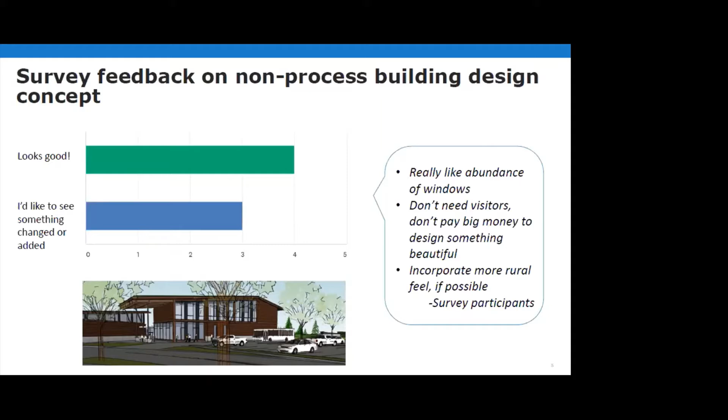So those are thoughts and comments we'll take back. There was also one more slide that looked at the process buildings, and we had more of a negative reaction to this one, where 5 of the 7 would like to see something changed. It looked like those comments were around making sure everything was kept within the height limits, and trying to find ways to keep the height to a minimum by looking at things like partially buried structures or tanks. Again, things we'll pass along to our architects for them to take into account as they start thinking about how to design these facilities.

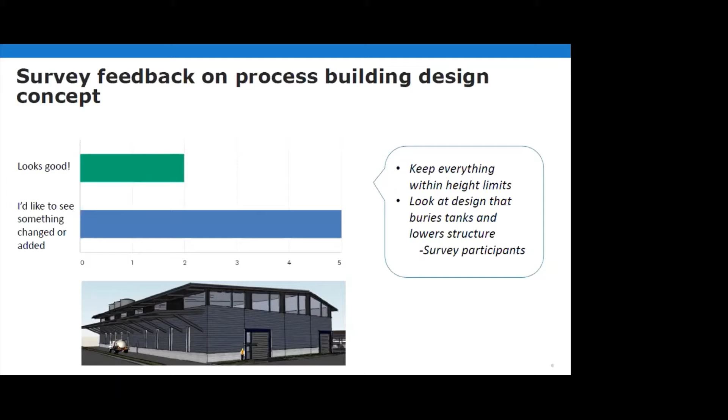So at this point, that's the end of my portion of the presentation. And at this point, I will pass things to John Johnson with the Portland Water Bureau, and he'll get our construction team introduced.

Thanks, David. And thanks everybody for coming tonight and attending the group session here. Most of you, hopefully, have been introduced to me before, but I'm John Johnson with the Portland Water Bureau, and I'm going to be the construction manager representative for the Water Bureau, who's going to work with a team of contractors who will actually build the facility.

Right now I'm the construction manager for the corrosion control facility, and we're working with MWH Constructors on that project. We're also going to work with MWH and a joint venture with Kiewit on the facility. We selected MWH and Kiewit here sometime last year to be the CMGC, the construction manager and general contractor, for the filtration facility construction.

We're entering into a contract currently for pre-construction services, and that stage will last for about 2 years. The team will help us by providing insight into construction practices, estimating, and a lot of different aspects of contractor expertise on the input of the design. So with that, I'd like to introduce the team of MWH and Kiewit, starting with their construction manager, John Kolkman.

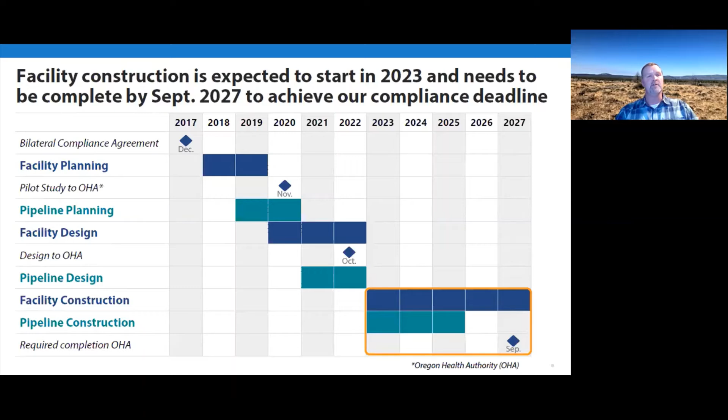Right now we're in pre-construction and we're also in design. So the construction team is going to work hand in hand with the design team throughout the design process to help maximize the design efficiency, get contractor input early in the process so that we can incorporate those things and keep moving forward. Obviously, we're going to have ongoing community conversations with you and with others.

We're going to be coordinating the facility design and getting contractor input on construction to the designers so we can best incorporate that. We're going to continue to evaluate traffic and site access considerations. Coordinating with the pipeline design and contractor - you heard a minute ago that we're in the selection process for that contractor, and we understand we're going to have a lot of folks working in the same areas, and coordination between the facilities contractor and the pipeline contractor are going to be important, both with access and construction. So we recognize that as being a high point that we need to focus on.

During construction, obviously, we're going to continue communicating with the public. I am a face that most of you guys have seen prior, and I'll be a face that you will continue to see. Those of you that have gotten to know me a little bit, I think you understand that I'm pretty open and welcome conversations with you. I want to hear from you to see how things are going and see what we can do better. The contractor always has a safety first philosophy: safety for them, safety for you, safety for the project.

We will be developing a construction management plan as we go through this pre-construction phase. We're going to take the input that you guys give us through this process and try to incorporate it as best we can. We can't wave a magic wand and make all of the noise and all of the impacts go away, but we're going to listen and we're going to do what we can to address your concerns.

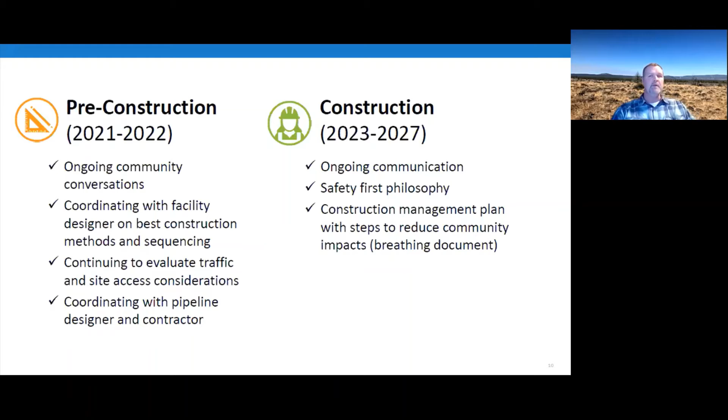With that, I think I'm going to turn it over to John, and he's going to go over a few of these slides more particularly.

Thanks, John. As John had indicated in the previous slide, safety is a very important component for any construction project, and it's a major focus of all of our projects and what we do. But safety doesn't just confine itself to the project construction. It also affects the local areas - it affects people that are living nearby, residents, etc. So it's more than just safety for the construction activities, but safety for everyone.

So how do we try and mitigate some of that? We have very site-specific safety protocols that control access to the site. We want to make sure that the access in and out of the site, regardless of how that turns out to be located, is well managed and kept safe. We want to make sure, for instance, that the site would be secured. It's quite a large construction site in that location, but typically for these types of projects, we would have the perimeter of the site fenced, and additionally, gate security with the compound where the administration and management side of things sits also separately fenced.

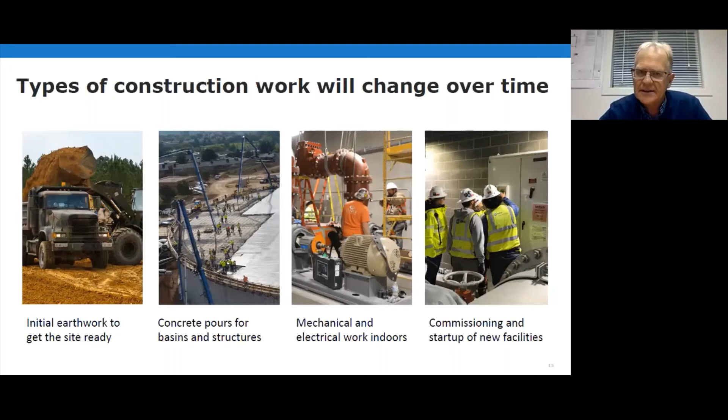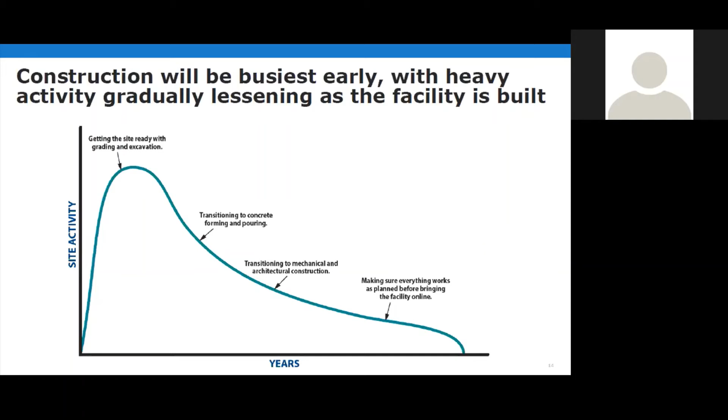I'll pause you again really quick here, because that person also responded that 6:30 is an early time for residential homes, and we do recognize that, but there is going to be some give and take. There's a timeframe that we need to get this project completed, and if we're not getting started that early in the morning, that puts time out further into our process. I don't know if you had anything to add, John, but I just wanted to acknowledge that comment was made. No, there's probably not too much more we need to say about that just at the moment.

Once again, construction activities typically start off primarily with earthwork and then going into concrete. Those first two activities take the first 1.5 to 2 years of the construction project, typically the heaviest portions. In those areas we will definitely have larger numbers of people on site to perform those activities. The concrete work is quite a high workforce period.

The construction activities I'm talking about are still a couple of years out. The fact that we've been brought on early in the process allows us to start trying to plan those things. As the design develops, we can look at what the schedule looks like. Once we get a better feel for what the design really entails, we can look at sequencing and scheduling, and resource loading the schedule to get an idea of what those manpower curves look like, and what work hours we'll be looking at during the weeks to get the work done within the Water Bureau's time frame.

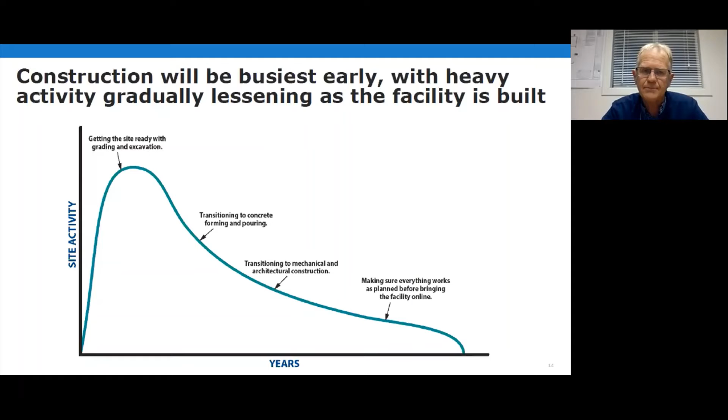There's a number of activities through here, but as we get into the mechanical and electrical, architectural concerns, and then going into commissioning and startup activities, the workforce starts to taper off towards the end of the construction work.

As I said before, the Bureau have already passed on to us some of the community input they've received from the local community. These are things we can take into account as we're trying to plan the construction work through this pre-construction period before we actually get into construction. There's a real benefit to having the ability to have dialogue not just with the Water Bureau and the designers, but also with the construction company that's going to be building this prior to construction even starting. It lends itself well to community involvement and being able to address or minimize some of the concerns that are raised. Also to make sure everyone is on board with what the expectations are for the construction work as we start that phase.

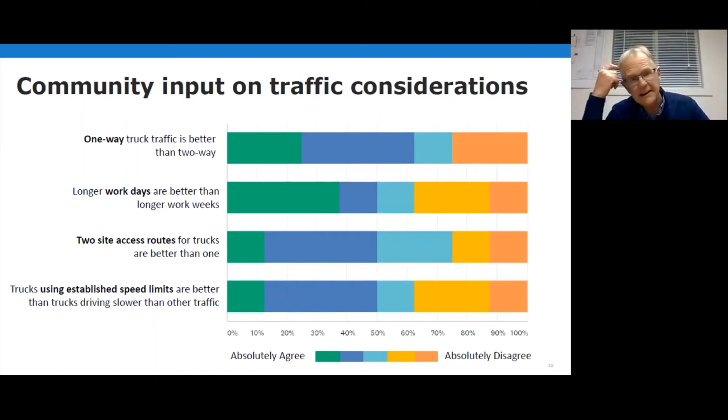Potential strategies to keep traffic moving - there's a lot of factors that come into this. Every project we do has its own differences and particular challenges, and this project is no different. At the end of the day, as John had said previously, there's limited roads in and out of the plant, and we have to share the roads with the residents. There's horticultural traffic in the area, resident traffic, school buses - things at certain times of day that we have to be mindful of and try to manage the work to accommodate local traffic conditions.

We have a lot of different activities going on. The first activities, as far as earthwork, involve a lot of exporting of material - trucking off material that appears not to be needed. We don't have all the details from the design yet and we're still looking at that, but initially there's going to be that normal sort of traffic to manage. We're going to try to economize the trips as much as we can with trucks going out with exported dirt - don't have them come back empty. We'll try to bring them back with other material to reduce the number of round trips. Some other strategies we're looking into include potentially having an on-site concrete batch plant.

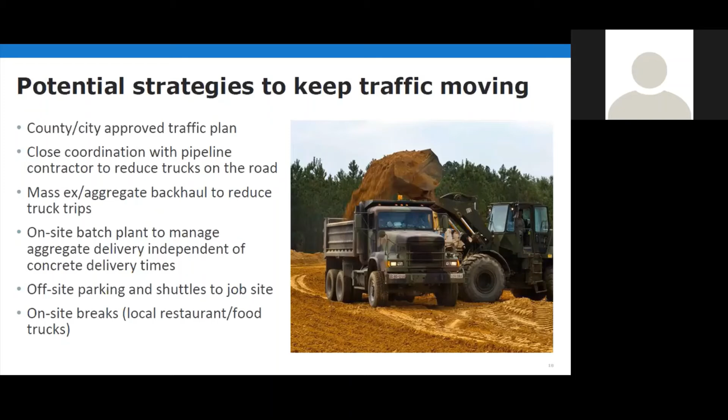Right, that's the last of our questions for now. John, do you want to keep moving on here? Yeah, I think if we can pop to the next slide - probably a good segue from talking about the roads.

One of the things we're always focused on with construction projects is how to keep the roads clean. At the end of the day, we've talked about the haul off and import of material, and that is truck traffic, so we want to make sure we're not tracking material out onto the roads but also keeping the roads clean. There are a few strategies we have for road maintenance, including providing wheel washers and undercarriage washers to keep the roads clean as trucks are leaving the site.

Another strategy we've used successfully on other projects is making sure the initial entrance into the plant is paved early in the process. That allows trucks to get rid of any dust, debris, and water from the truck washers on the paved road inside the plant before they get out onto the access roads.

We also make sure we're sweeping and cleaning the roads adjacent to the site where we've had any specific impact on road conditions, keeping them in good condition irrespective of how they exist now, and making sure they're well maintained and cleaned throughout the construction work.

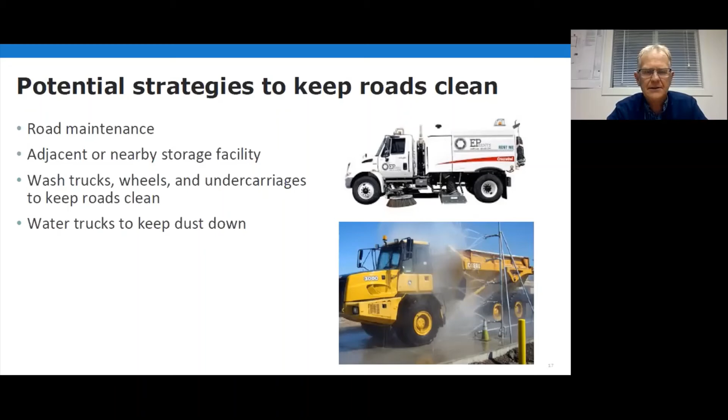Next slide, I think this is the final one. I wanted to talk about the concept of working when we're next to neighbours. We've had good success on other projects around the country making sure we keep the community involved and informed on construction activities, attending homeowners association meetings and community meetings to keep people in the loop.

Posting door hangers is another strategy, where we go around the neighborhoods to door knock and leave information brochures about the project and upcoming events, so people are aware if we have any special activities that may occur outside normal work hours.

We want to make sure we're available and have hotline access for people with complaints or issues, or if they're seeing something they don't think is normal, just to ask for information.

On some other projects we've had great success setting up an information booth in a secure area on site if we have a large event going, with coffee and donuts, because the construction project is going to be a big part of the community for the duration of construction, and we want to keep everyone informed about what's going on.

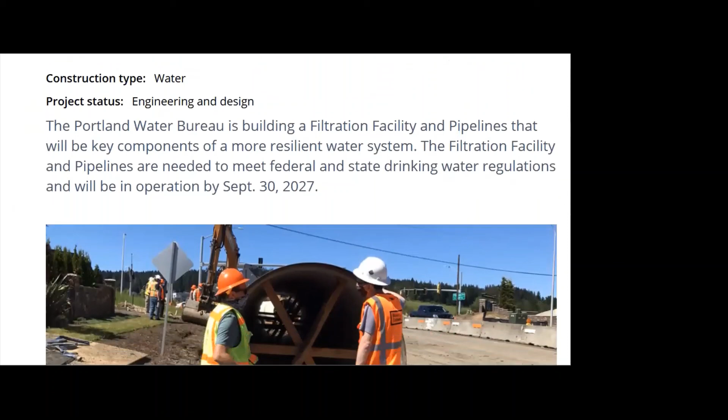Looks like Aubrey's showing our page there.

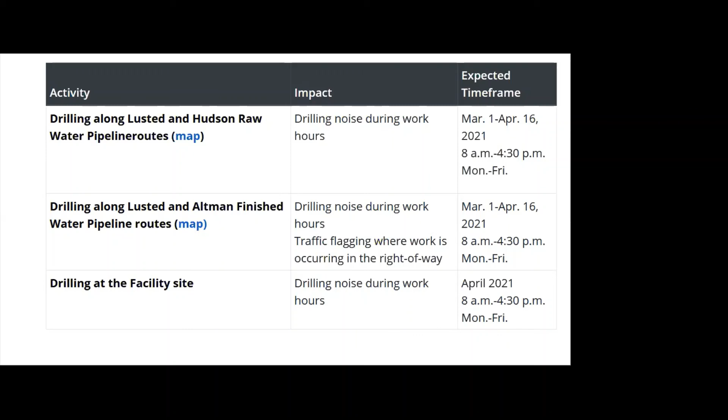Patricia put a comment in the chat about wearing masks and social distancing. Once we have an appropriate thumbs up from the health department and the city, that will certainly be one of our first priorities. We're all starved for human interaction and engagement, and we know doing this remotely isn't as favorable as being together. We look forward to doing it together again as soon as possible. This isn't a personal decision we're making - this is what we've been asked to do to keep people safe. That's our priority.

David and Benita, I have a couple of questions, hopefully not too long. One reason I asked about financing and costs, even though that's the subject of next month's meeting, is that this concerns a much larger group than our stakeholder group. When you have those discussions, I think it's important to do a big outreach beyond our group, because this is such an important issue - especially what it will do to people's water bills in Portland and other municipalities that participate in Bull Run, especially given that last year Gresham and other municipalities pulled out of the agreement. The costs have gone up since it was initially proposed to city council - I think we're now talking about a billion dollars. That's big enough that we need a much bigger public forum to discuss the costs.